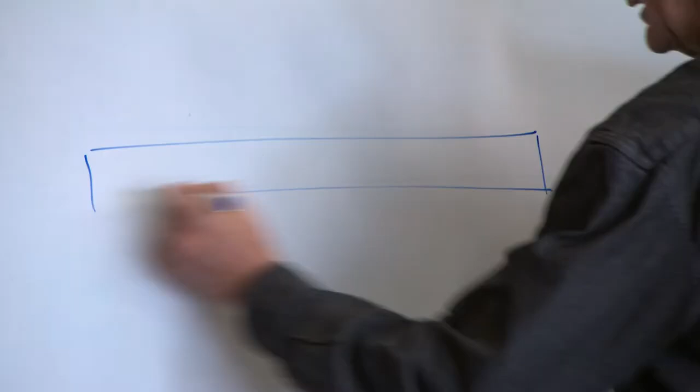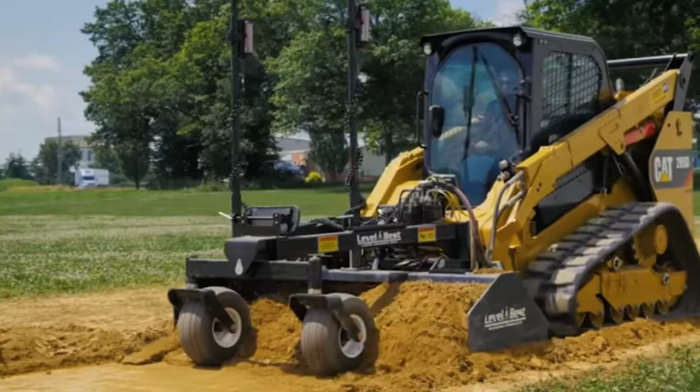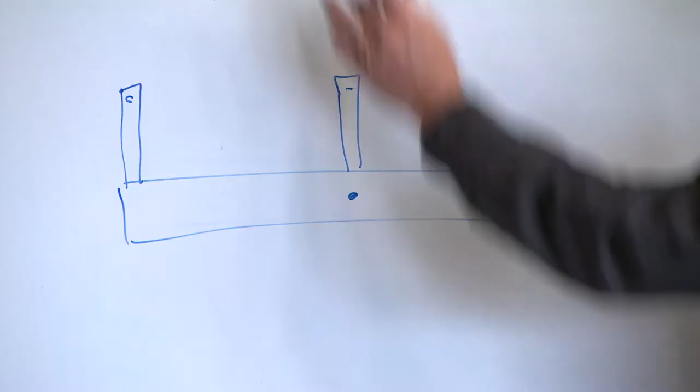Today we're going to talk about center pole blades and why we don't use them. So, what is a center pole? Well, if you have a blade with a center pivot, you have to run a center pole if you're sensing, because it's over the top of the pivot, which is the most accurate position for that. But unfortunately, it's the worst possible position for this side of the blade here, and we'll get to that. So, with a center pivot, one controls your elevation and one controls your crossfall. So this one is controlling your crossfall, this one is controlling your elevation.

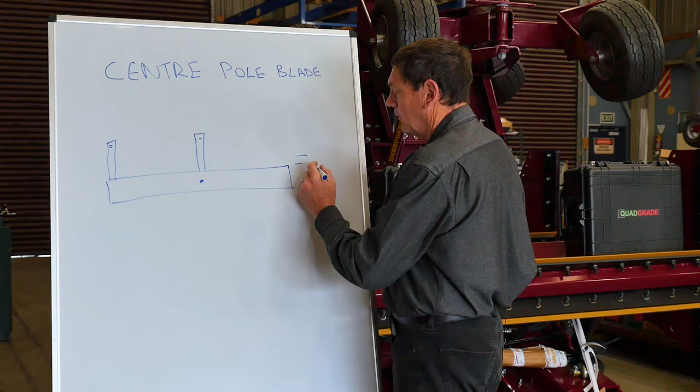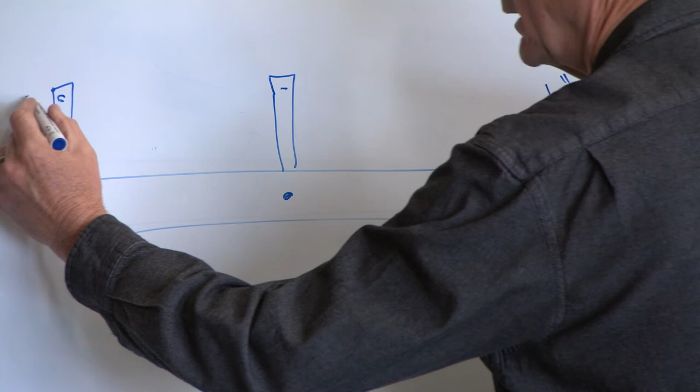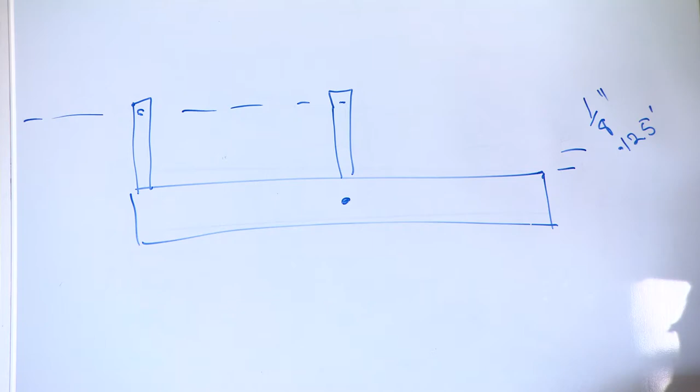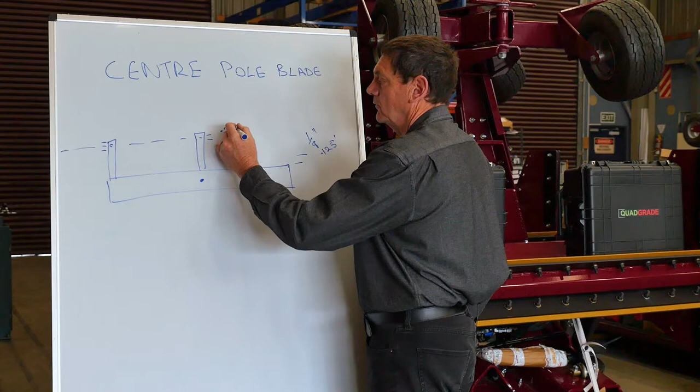So what happens? Well, we want to be controlling within our 1/8 of an inch, which is 0.125. Let's assume we're running a 2D laser beam through here, okay? And this one are all reading on 0, and that's all fine. But as we start grading, we always have a tolerance on our sensors. Doesn't matter what it is, there's always a tolerance because you can never have it perfect. And normally that is plus or minus 1/8 of an inch. So here we have 0.125 inches, and here 0.125 inch.

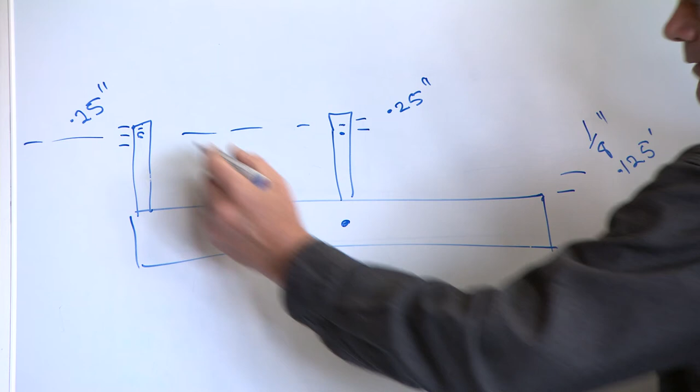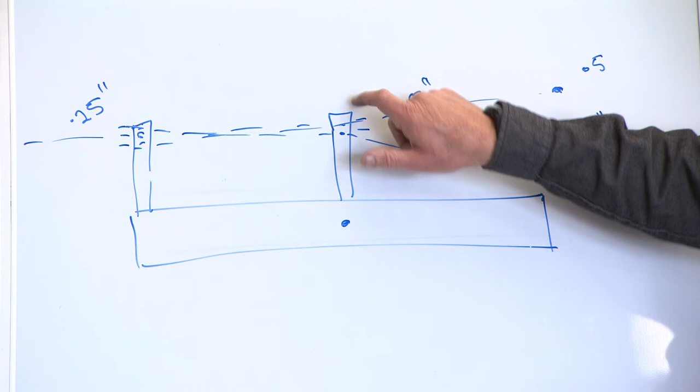What happens is we can be at the top end, which is 0.25, we can be at the bottom end of this one, so this comes through here, or it can come through here. So we can have 1/2 an inch of deviation on this side of the blade and still read within tolerance on each other side.

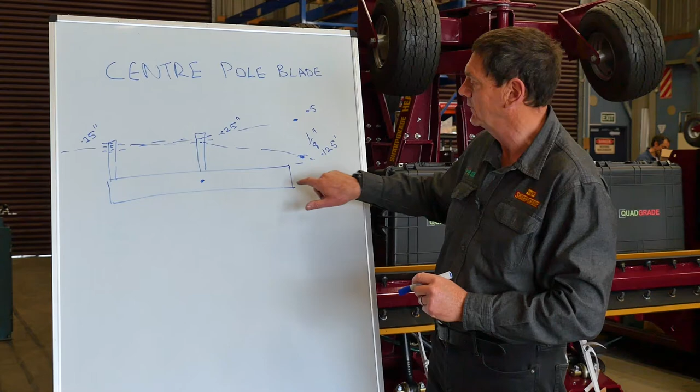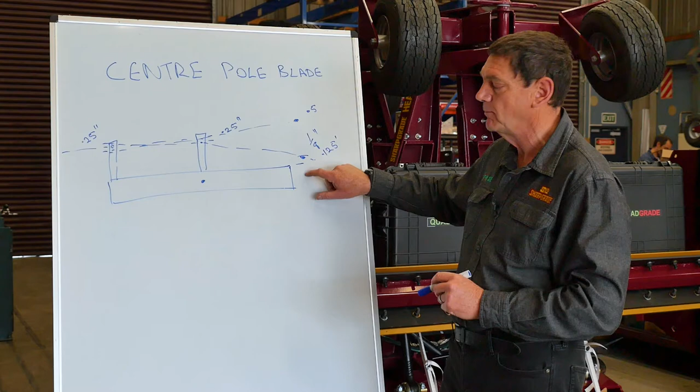So a center pole blade is actually a best guess blade. There's no accuracy in it at all, because this side is a combination of this and this. And we've talked earlier about how just with standard manufacturing tolerances we can have 1/2 an inch of movement in here. Well, you then double that with the accuracy in your sensors and their tolerances that you're giving. So you can have 1/2 an inch in here and 1/2 an inch here. So this blade here can actually be, this point of this blade can be up to 1 inch out and still read.

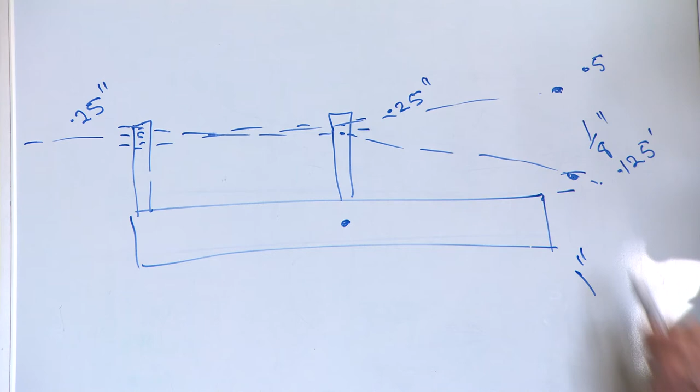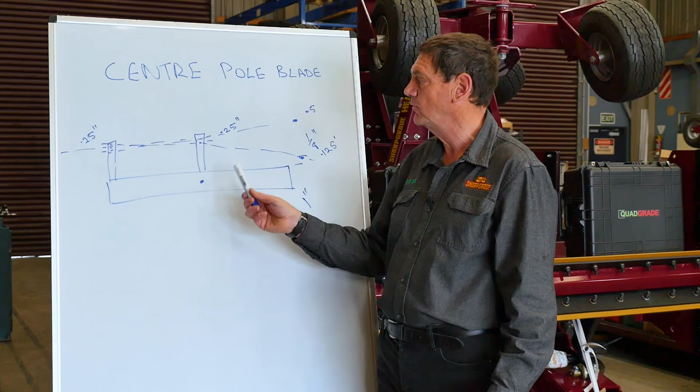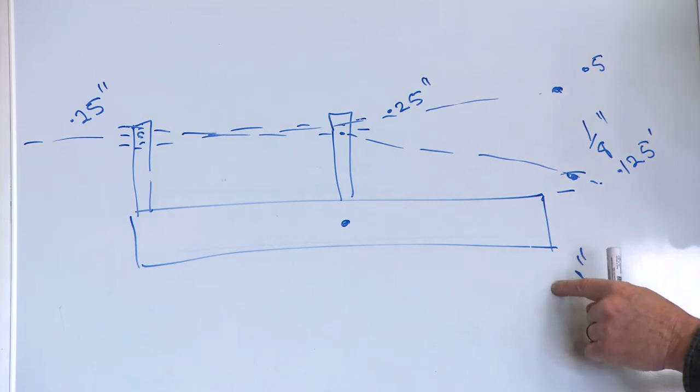Now, there is no way that a center pole blade can grade with the accuracy that most people claim of within 1/8 of an inch. It looks like it is, but it's actually not, because of the tolerances inside your receivers or your sensors. So next time you see a center pole blade, think about the accuracy of this point here and whether it's actually true or not, because physically it cannot be true.

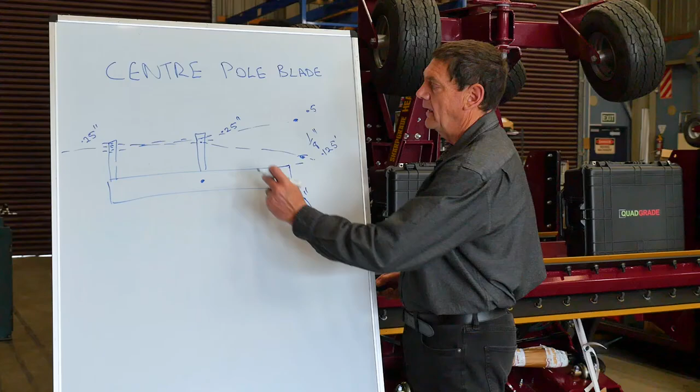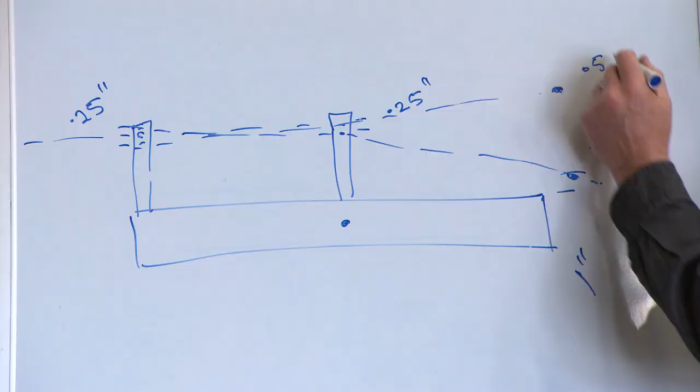It can be reading as if it is, but in actual fact it can be anywhere. So anyone that says that they're grading within 0.1 of an inch with a center pole blade is stretching the truth, because this here is actually what they can be grading to. So I hope that portrays the problems with a center pole blade with a combination of a center pivot. It's totally the worst possible combination you can ever have for controlling a blade.

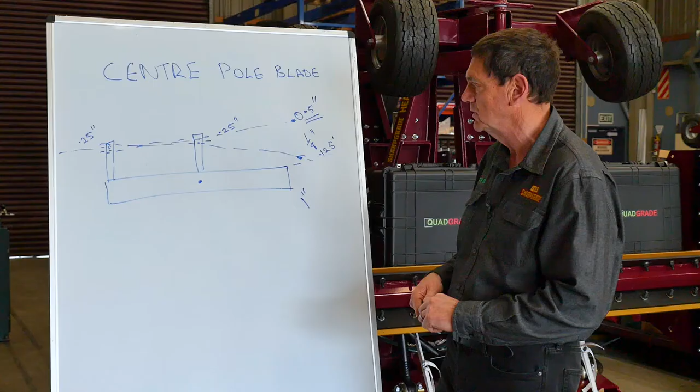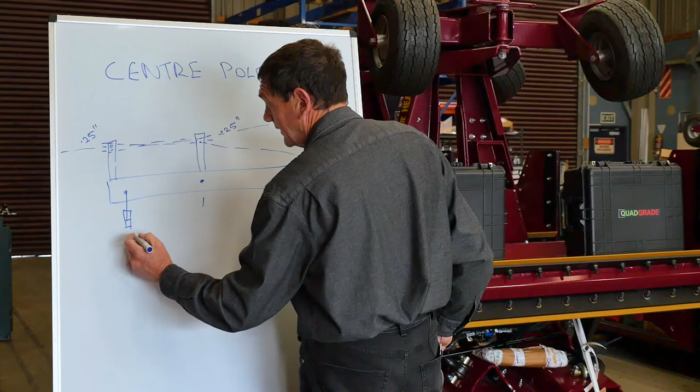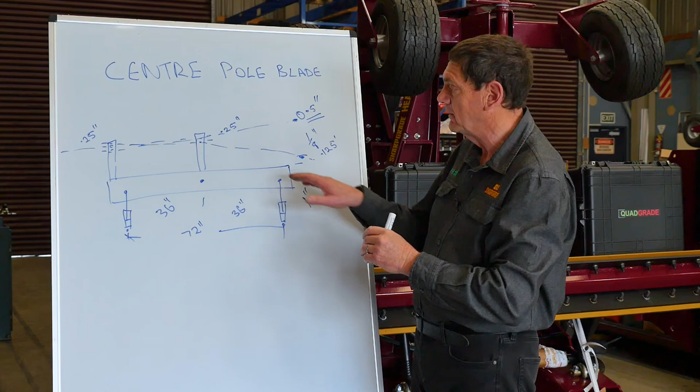Let's compare that to a quad rod linkage, and I can just draw it on the other side here. So with our quad rod linkages on a 96-inch blade, we would be running these at 72 inches, which is 36 inches there, 36 inches there. We run zero clearance sphericals because we don't have to have any manufacturing tolerances to align anything, so we can run these at zero.

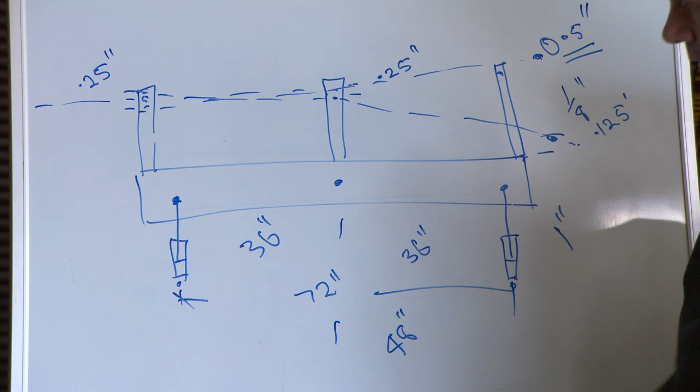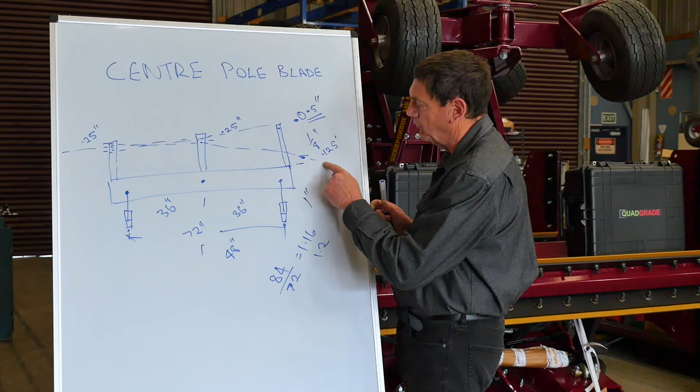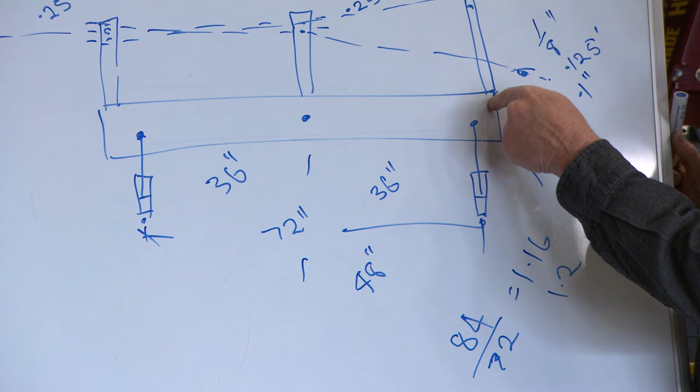And we have our sensors at both corners. So our sensors are at 96 inches, so that's 48, and our cylinder is at 36 inches, but it's actually off this point here. So it's 36 plus 48, which is 84, over 72, okay, which is 1.16, let's say 1.2. So if we want to grade within 0.125, we have to shift our cylinder 0.1 inches to get 0.125, and which means that because the cylinder is virtually under the sensor, there is no movement, and so our accuracy is multiplied by several times of this.

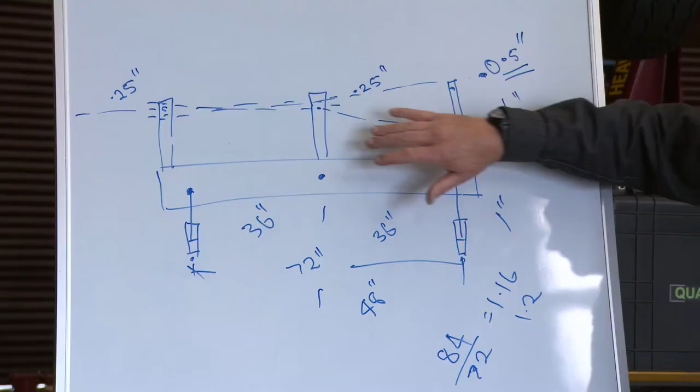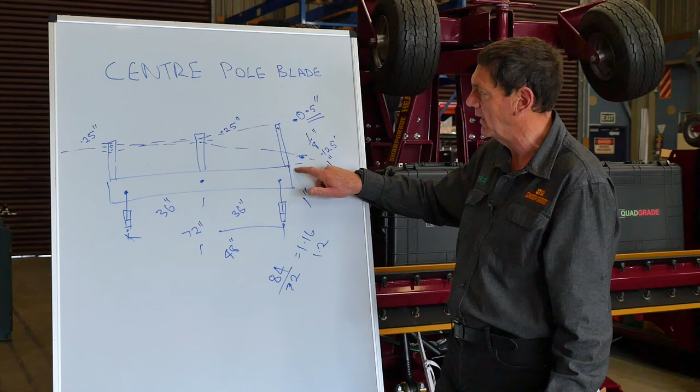So you can see why a quad rod linkage with the cylinders mounted to the outside with no cross coupling is the best system. There is nothing better in respect of controlling a blade. And a center pole and a center pivot is the utter worst. You cannot get anything worse than that combination. So next time you're looking at a grading box and you see anything with a center pivot, you know that's a best guess system. They don't actually know what's going on here because of the inaccuracies in the sensor.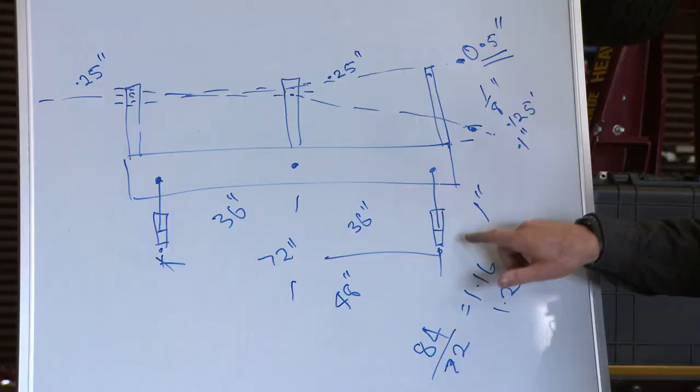And the tolerances that you set in the sensor means that you're guessing where you are here. Whereas a SharpGrade with quad rod linkages, the cylinder is right out there, right below the sensor, so basically it holds it super tight and super accurate. So I hope that's clarified why a quad rod linkage is so much better than a center pivot and a center pole.